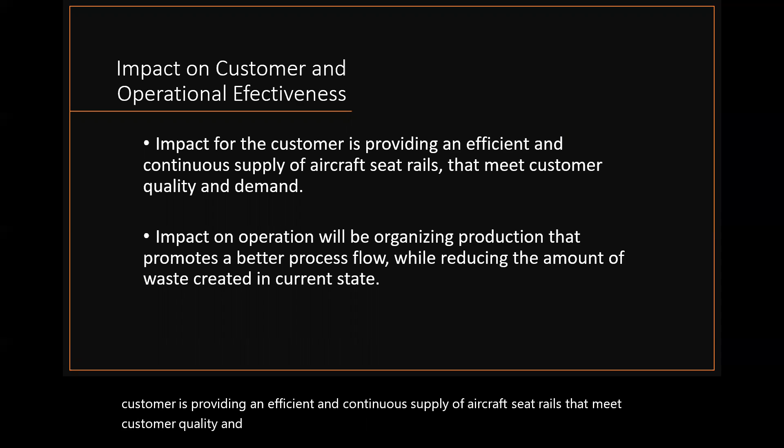All right, so the impact on customer and operational effectiveness. So the impact for the customer, obviously because they're in the business of making seat rails for aircraft, is providing an efficient and continuous supply of aircraft seat rails that meet customer quality and demand. The company is not very efficient when it comes to producing these seat rails. There's a lot of rework and a lot of back and forth.

So the impact on operation will be organizing production that promotes a better process flow while reducing the amount of waste created in the current state. That's just saying that the way we're going to move things around and the way we're going to achieve these is going to create a better flow for the operation.

So the five lean principles, obviously, is going to be define value, which is understanding what the customer wants and the best way to deliver it. This can be accomplished by analytics, surveys, demographic info, or by simply taking the time to see what they find value in or distracting. Establish how the customers utilize a product or service to do their job or accomplish a mission. The customer wants the best quality seat rails at the best possible price.

So that's what we're trying to produce. That is our value. We are trying to figure out how the seat rails can be created better and more efficiently to provide them when needed.

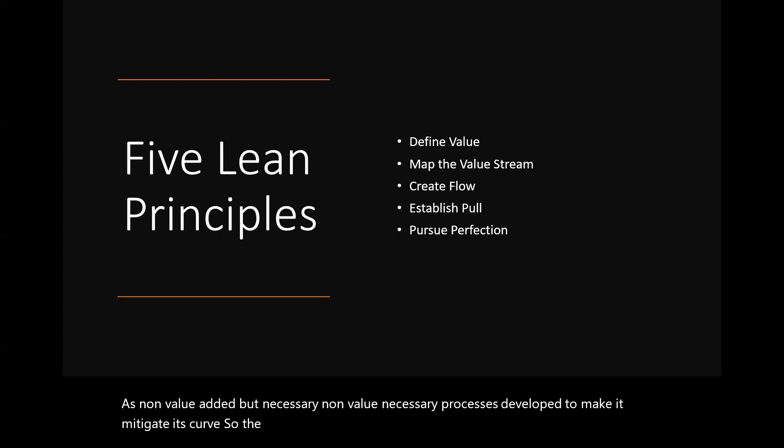So creating flow, ensuring that waste has been removed from the remaining steps, are value adding. Value creating steps occur here to ensure smooth running flow towards customers. Questions like what tools do we need, how often do they need to be used, and for what job each tool needs.

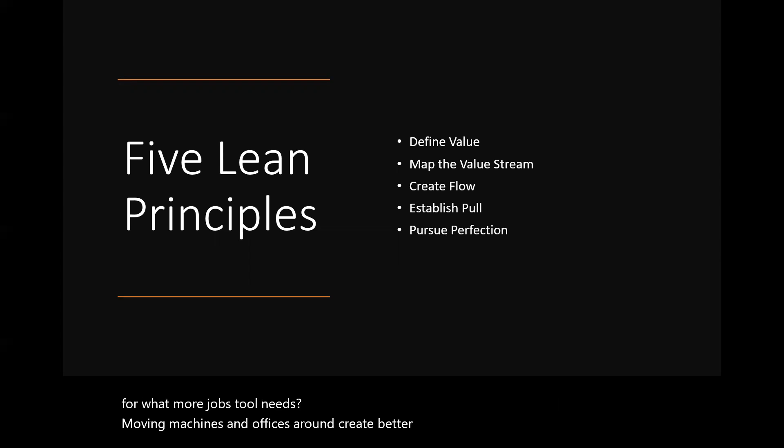Moving machines and offices around creates better flow to reduce movement and transportation. That's what we're trying to eliminate with this, trying to move some offices, machinery, and people around to where it creates a better flow and we're not losing as much time.

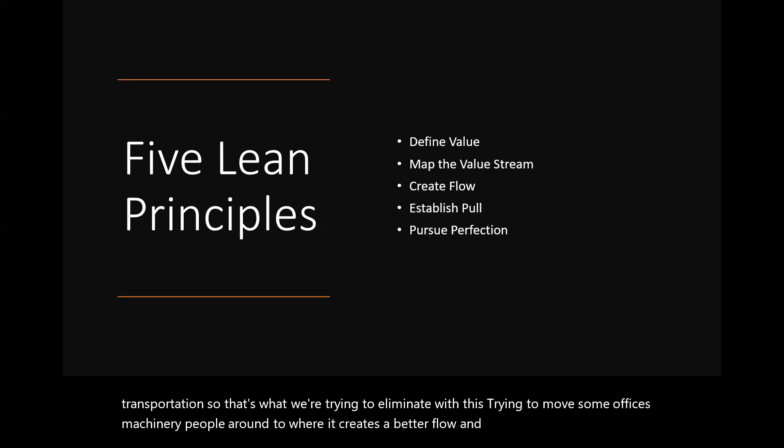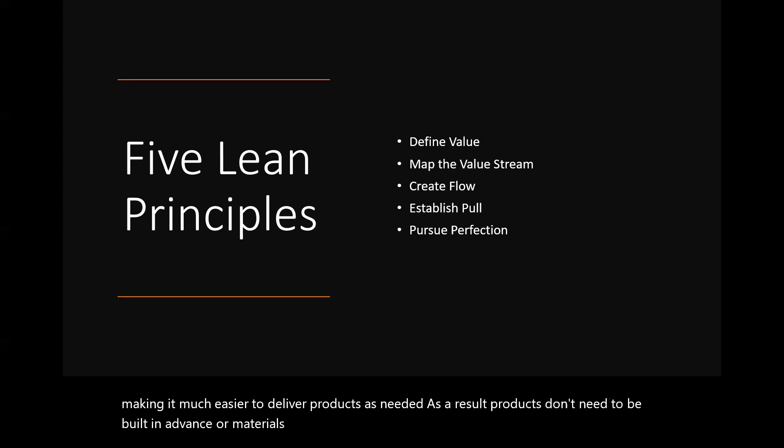And then obviously after you create flow, you got to establish your pull. With improved flow, time to customer can be dramatically improved, making it much easier to deliver products as needed. As a result, products don't need to be built in advance or material stockpiled. Ask the question: how can we make our approach meet the needs of the customers exactly when they need it?

Then after all that is said, it's time for pursue perfection. The way I believe we all look at this is pursue perfection is about the continuous improvement process. So we might be able to iron out some wrinkles in this, but it doesn't mean we should stop there. We should keep on moving to further improve the process, so small steps turn into much larger ones.

All right, so there's our five lean principles. So, using lean to improve quality.

So we'll be able to do this. Our cycle time or takt time, all that should be reduced if we implement the current proposal. Cycle time could be reduced by implementing poke-yokes, and we'll talk a bit more on that. Takt time determines how many products must be made per minute to achieve customer demand. Also, employee skills development: train employees on how to handle small problems, give ownership, and change the plant floor layout.

It goes into several more things after this, like how we're going to talk about it.

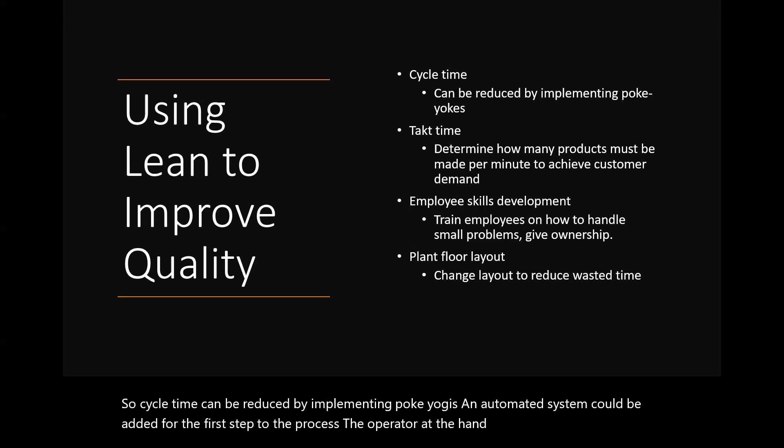Cycle time can be reduced by implementing poke-yokes. An automated system can be added for the first steps of the process. The operator at the hard metal planer machine could send an electronic message to the raw material section in the tool crib, stating that tools and materials need to be delivered to the hard metal planer machine section. This could eliminate the process of checking paperwork and walking to different sections for parts and tools.

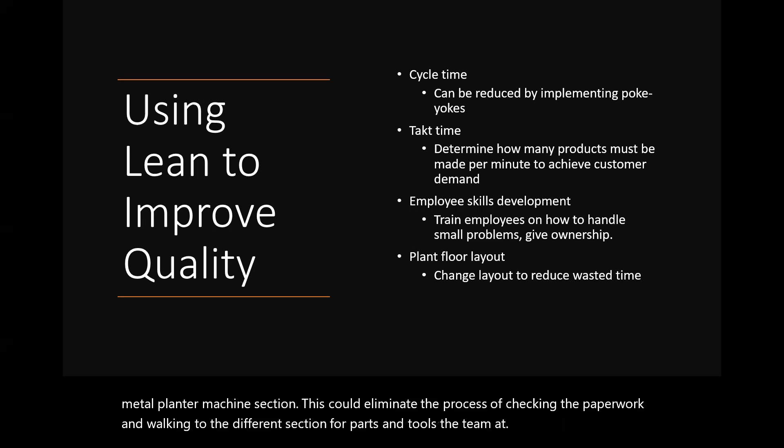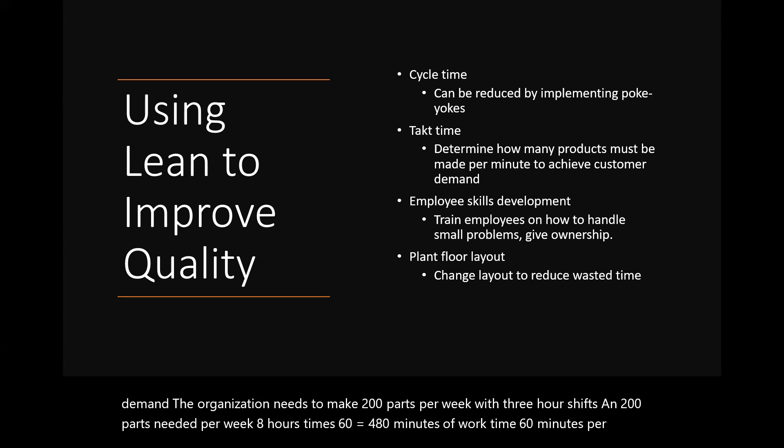So 40 need to be made per day. 40 parts over 3 shifts equals 13.33 parts needed per shift.

They're doing more right now when they could be doing less if it was a more efficient system. Needed to make the 8-hour shifts, that means we need to make one more part every 31 and a half minutes. So one part needs to be made every 31 and a half minutes.

We can use the takt time to measure how well production is going. If we're able to produce one part every 31 and a half minutes, and if the takt time is not being met, then we can use the VSM to determine where the waste is and eliminate it.

Moving on to the next point, employees should be encouraged and trained on how to handle the small problems that will arise. This will give employees ownership over a process, and in turn employees will contribute more. Incorporating the entire workforce to solve problems will help each member learn about their coworkers' jobs and struggles. This can help solve problems easier, like how to meet the new customer demand of 225 units per week.

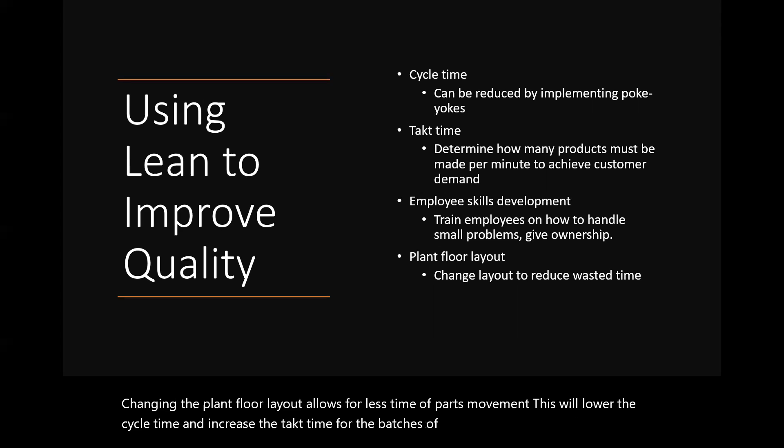Changing the plant floor layout allows for less time spent on parts movement. This will lower the cycle time and increase the takt time for the batches of parts being made. The next two slides show the before and after proposal of the new floor.

So all that is saying that realistically, they can produce less if they were doing better, to actually do more.

All right, so here's the current plan, this is how it all is. You have your hard metal planer up here, your 5-axis is way over here. It goes hard metal planer, your 3-axis, and then up to your 5-axis. Well, 3-axis to QA, and then QA to 5-axis, and it's just everywhere.

So our proposal was to move it around a little bit to create a better flow of how things are being done.

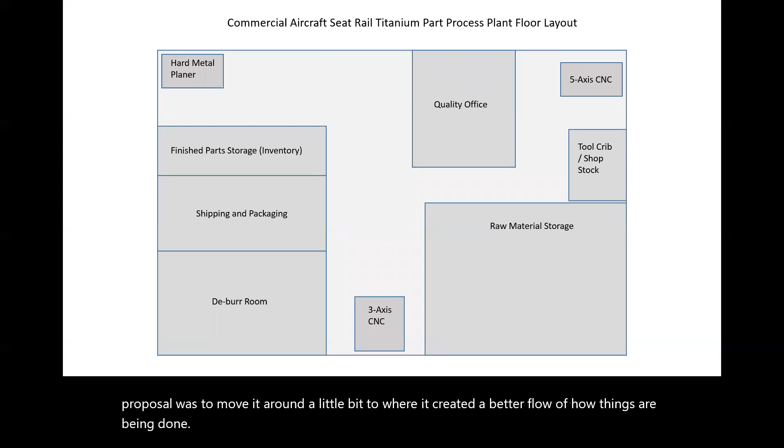So here we're moving everything around. We're keeping our raw material storage and our tool crib closer together. Then the 3-axis, and then for inspection, and then back to the 5-axis if it passed inspection, and then back to quality, that's the office, and then to the deburr, finished parts, and then shipping and package.

So it just creates more flow, less walk time. Because when I was doing the math earlier, they spend almost an hour and a half a day not actually doing physical work, but more or less walking, inspecting, and just setting things up.

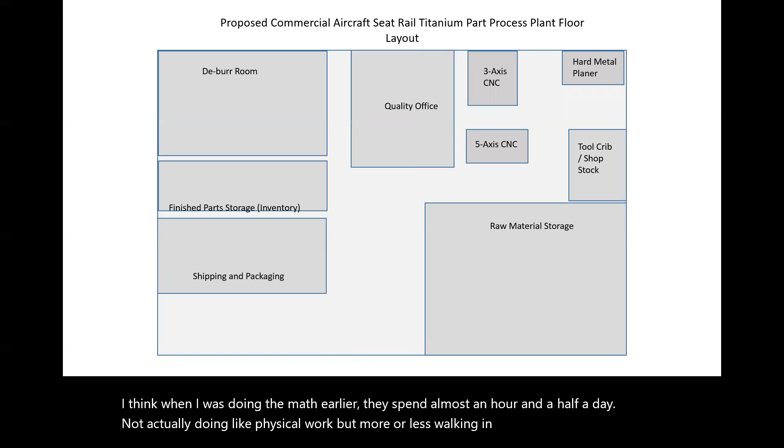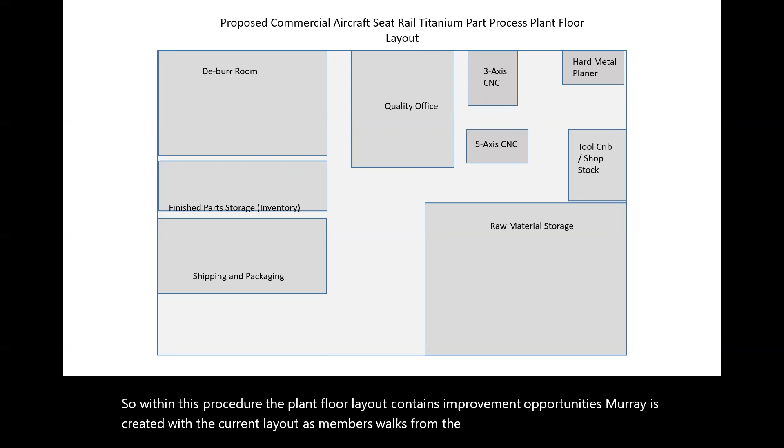So within this procedure, the plant floor layout contains improvement opportunities. A survey was created with the current layout as members walk from the raw material storage area, located at one corner of the room, to the hard metal planer, located on the opposite corner. From there, the member walks to the tool crib located next to material storage, and then back to the planer.

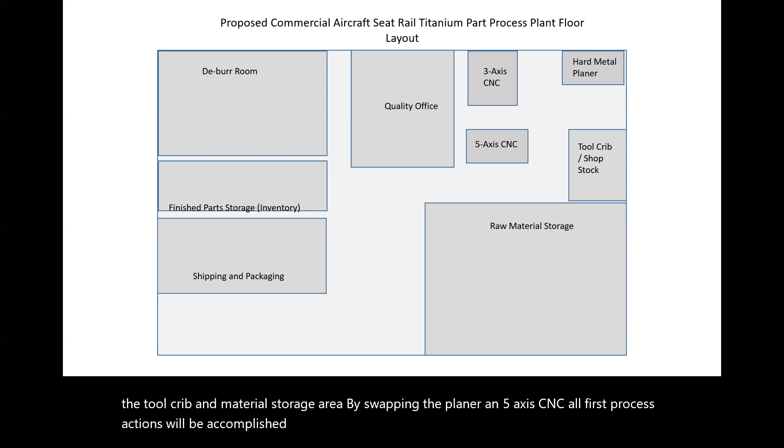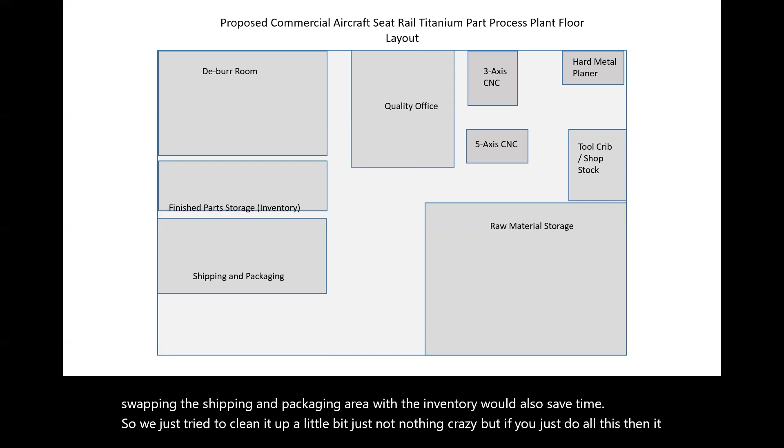Before taking the products to the quality office located close to the tool crib and material storage area. By swapping the planer and 5-axis CNC, all first process actions will be accomplished on the west side of the floor. On the east wall, swapping the shipping and packaging area with the inventory would also save time. So we're just trying to clean it up a little bit, nothing crazy, but doing this helps reduce a lot of the time for walking, movement, and transportation.

So, to increase productivity. Right now the productivity customer demand is 200 parts per week, 225 actual parts made per day, 15 parts per shift, 3 batches, 5 parts per batch. And then we have the hard metals parts, 10% a day rejected.

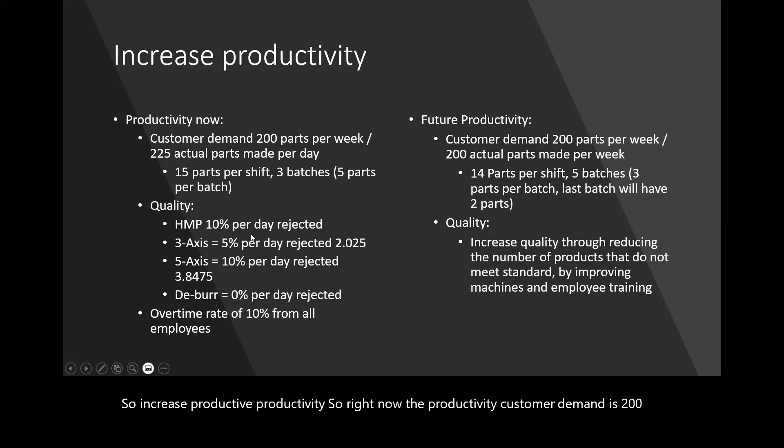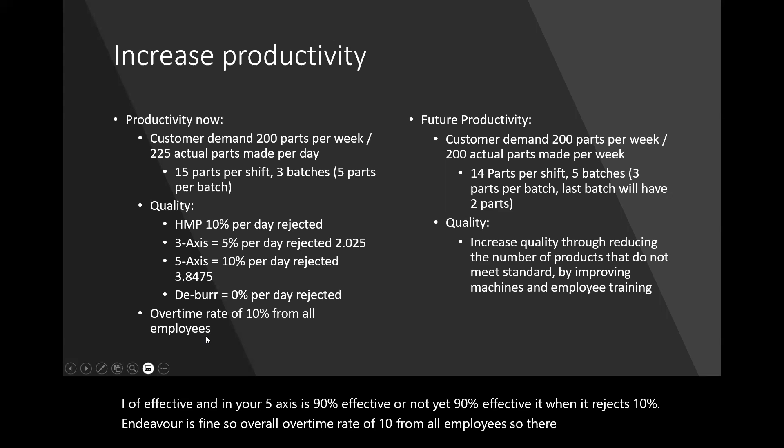So it's already 90% effective. Your 3-axis is 95% effective. Your 5-axis is 90% effective, meaning it rejects 10%. And deburr is fine. Overall overtime rate is 10% from all employees. So there would be less overtime and more production if the CNC machines were more effective and less faulty.

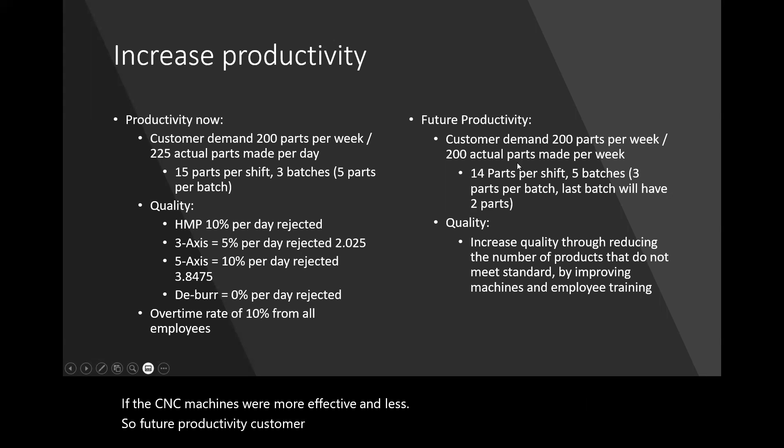So future productivity: customer demand 200 parts per week, 200 actual parts made per week, 14 parts per shift, 5 batches, 3 parts per batch. The last batch will have 2 parts.

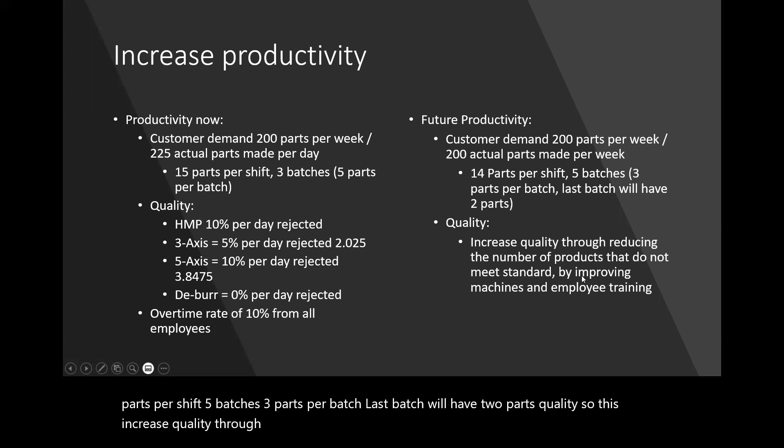Quality. This increases quality through reducing the number of products that do not meet standard by improving machines and employee training. This was also added, but maybe we'll just move to the next slide because we'll talk about this there.

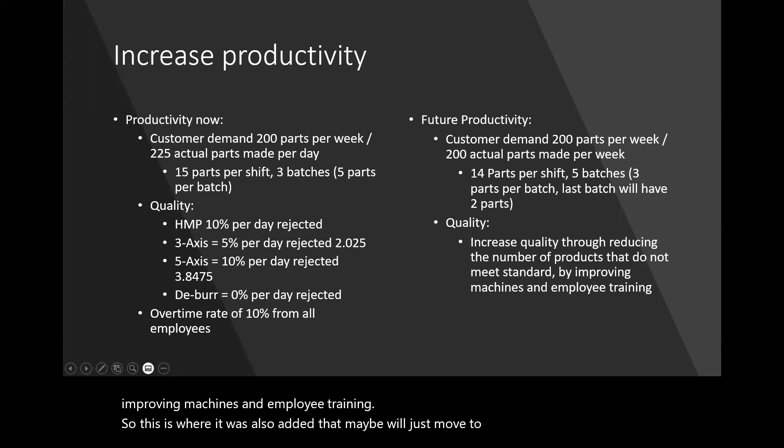Just a bit of reading says that having people come in and show the general basics and upkeep of these machines could potentially raise the effectiveness of the machines, bringing it up from 90% to 95%, to reduce rework, because that's what's happening a lot. We're spending a lot of time, because for every 10 rails that come in, one fails. If it takes 31 minutes to do one rail, then you just lost 31 minutes of work on that rail because of machinery.

And that's where I also looked into the CNC machines. They run pretty heavily on software, so maybe it's time for the organization to upgrade their software for the CNC machines. If it's something as easy as that, we can increase the effectiveness of the machines and spend less time doing rework and stuff.